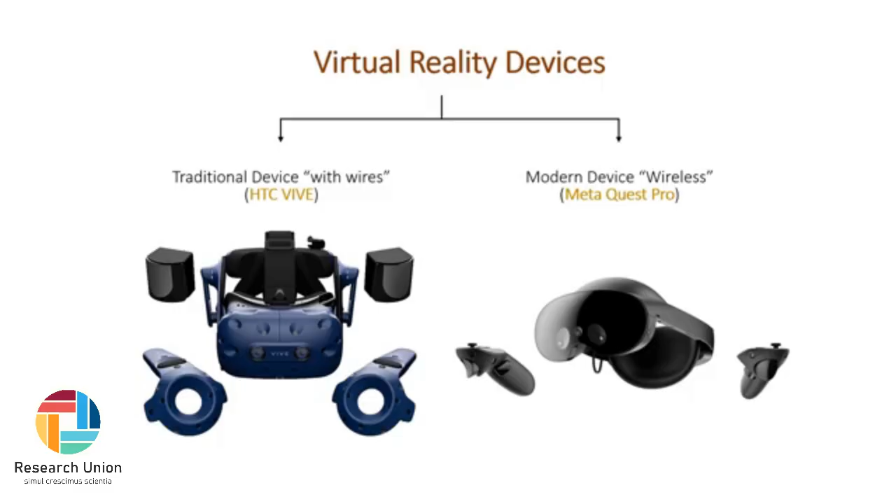This study has been conducted during weeks 10, 11, and 12.

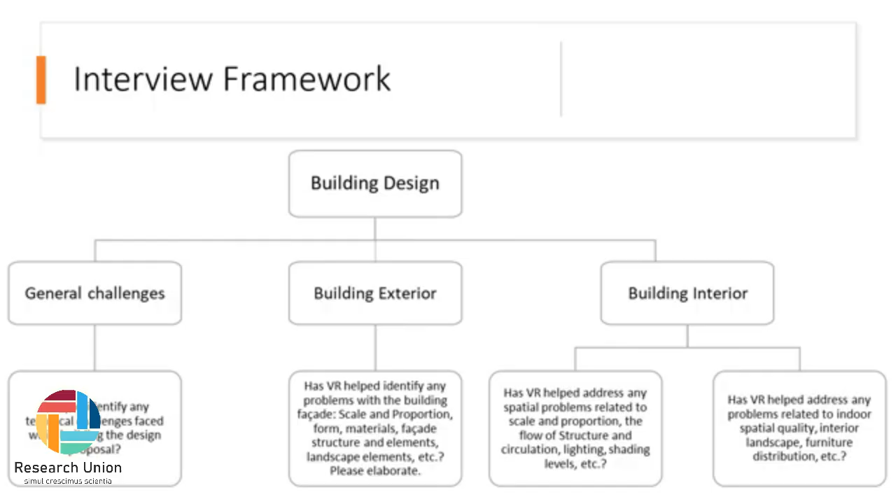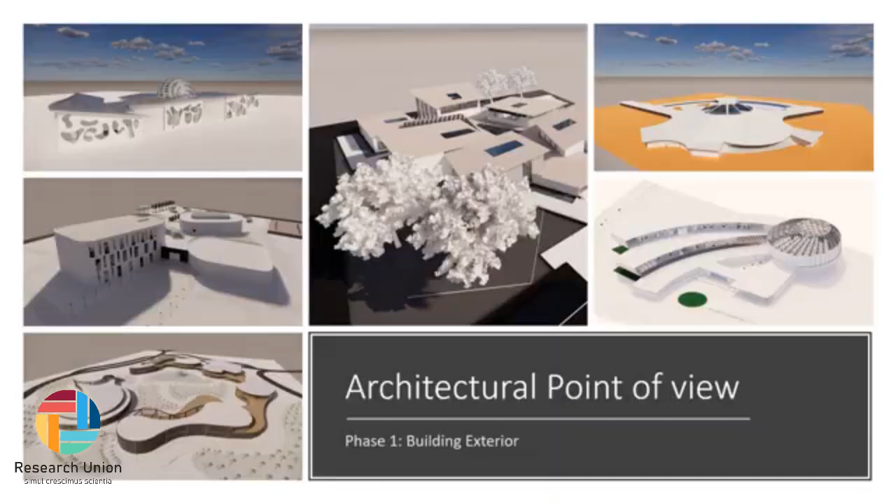This is just to show how the interviews have been conducted. This is the first part, and as I said, we have 5 students.

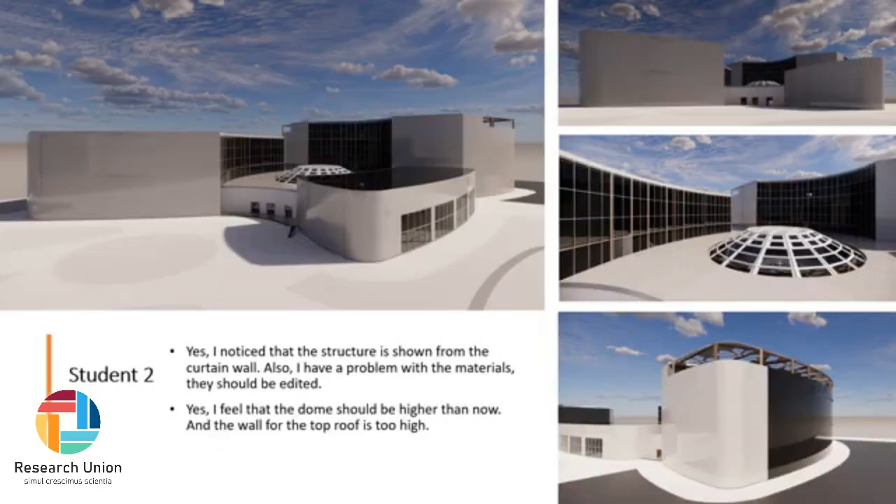So this is, for example, the answers from the students. Student 1: yes, the spacing between the louvers is not the same as I expected in Revit, for instance. Yes, it helped me see the building itself in a more realistic way. Student 2: yes, I noticed that the structure is shown through the curtain wall. Also, yes, I feel that the dome should be higher than now.

Student 3: Yes, I edited the materials, but still it's not like what I did in Revit. So you can see that Revit will not show you all the details that you desire. Also, the size of the building itself is huge. I like the building in general, but there is something not shown with my model landscaping.

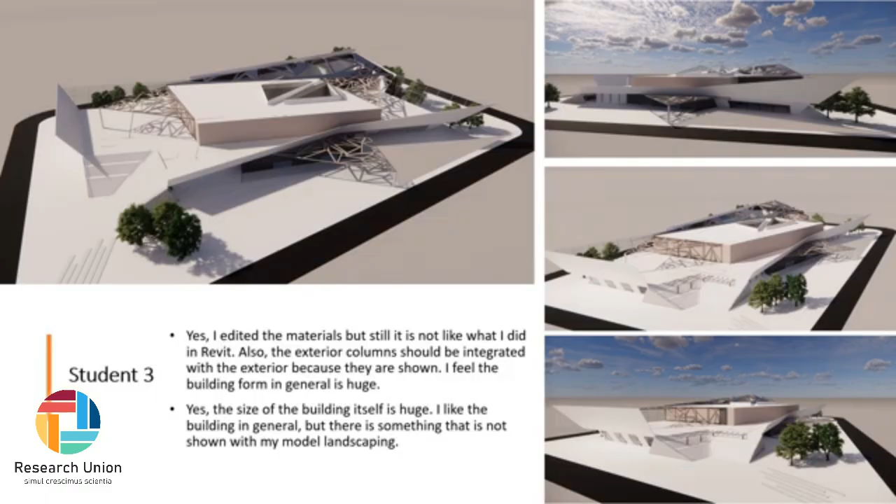Student 4: Yes, the problem is when I see it in Revit, it's not the same. For example, the facade materials are not correct also. The building size is fine as I expected.

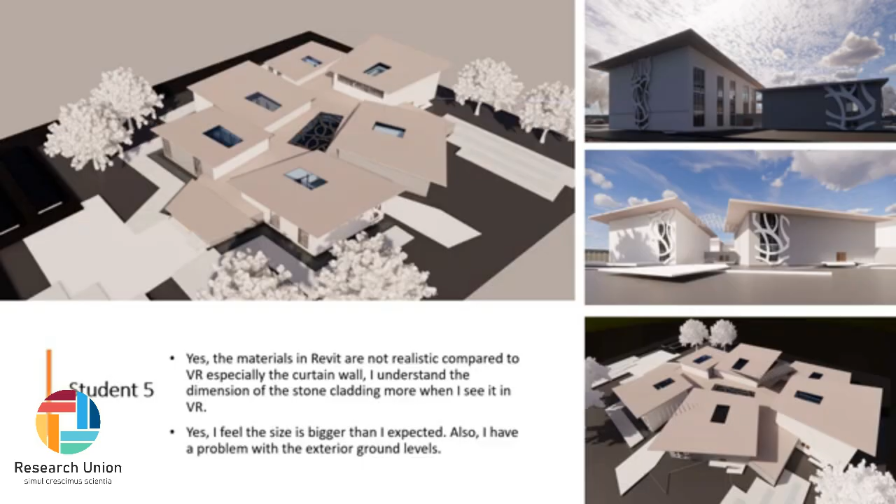Student 5: Yes, the materials in Revit are not realistic compared to the VR, especially the curtain wall for instance. I feel the size is bigger than I expected.

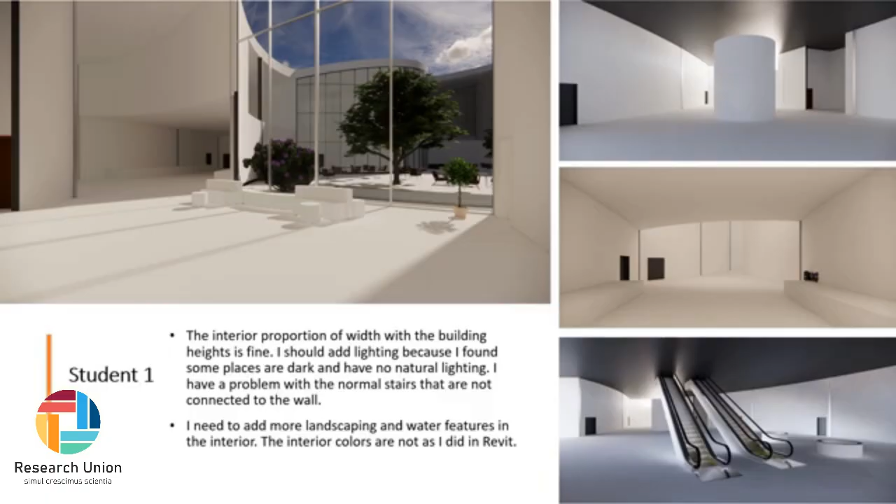Then from the architectural point of view, building interior - so the first phase was about phase 1, building exterior. Now we are within the building interior. Same thing: the interior proportions of width with the building height is fine. I need to add more landscaping and water features. This is the solution provided by the student.

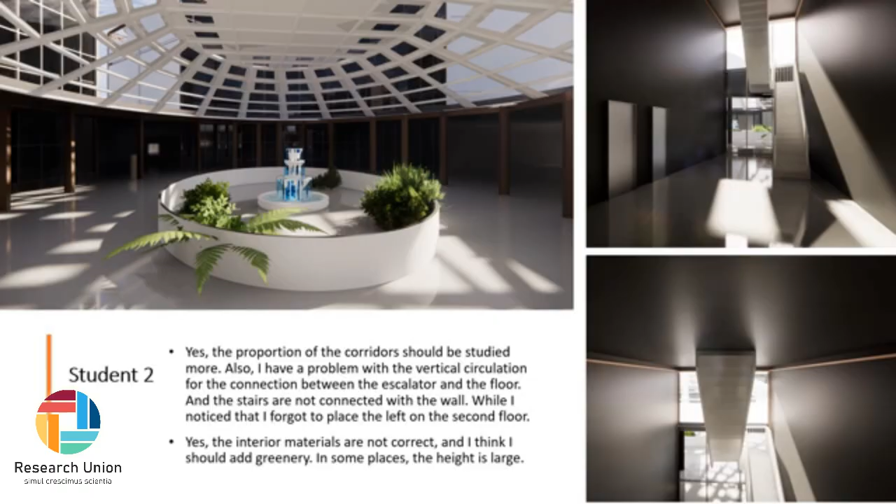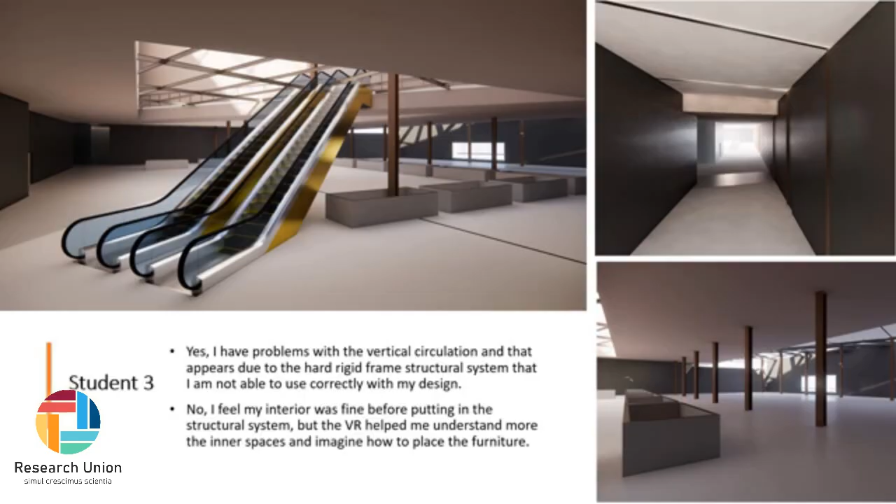Student 3: Yes, I have problems with the vertical circulation. Very important point that almost all architectural students faced during their design, especially for design 1, 2, and 3. I feel my interior was fine before putting in the structural system, but the VR helped me understand more the inner space and imagine how to place the furniture.

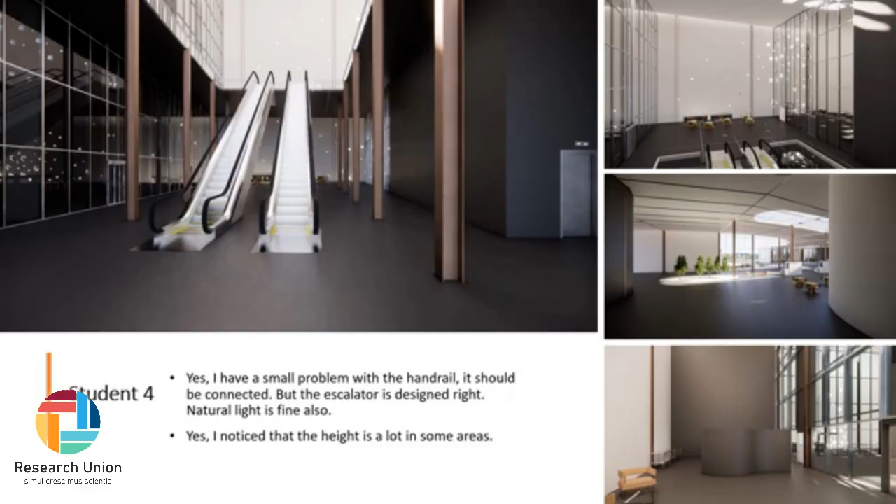Student 4: Yes, I have a small problem with the handrail. It should be connected, but the escalator is designed right. Natural light is fine also. The level of lux that you can get inside the space could be seen by using this tool. I noticed that the height is a lot in some areas.

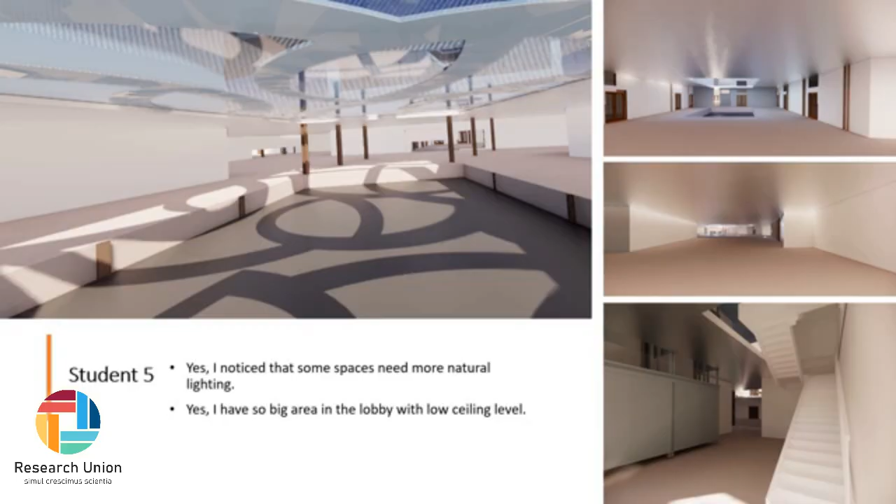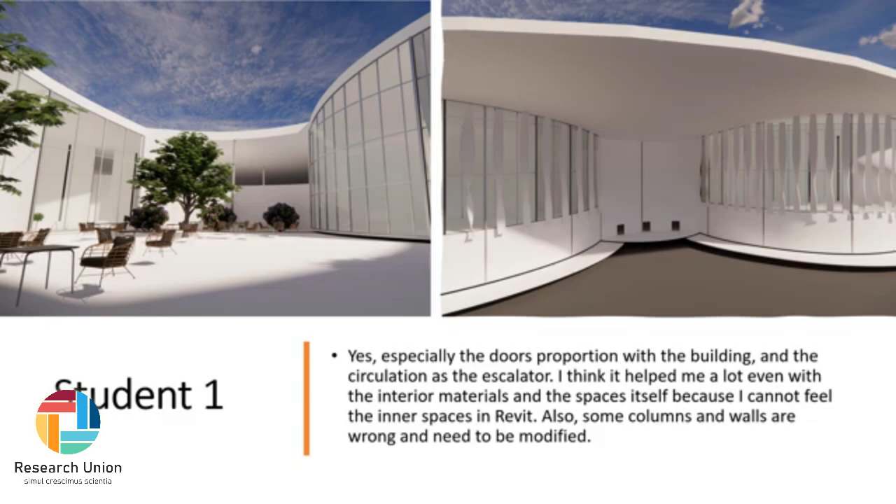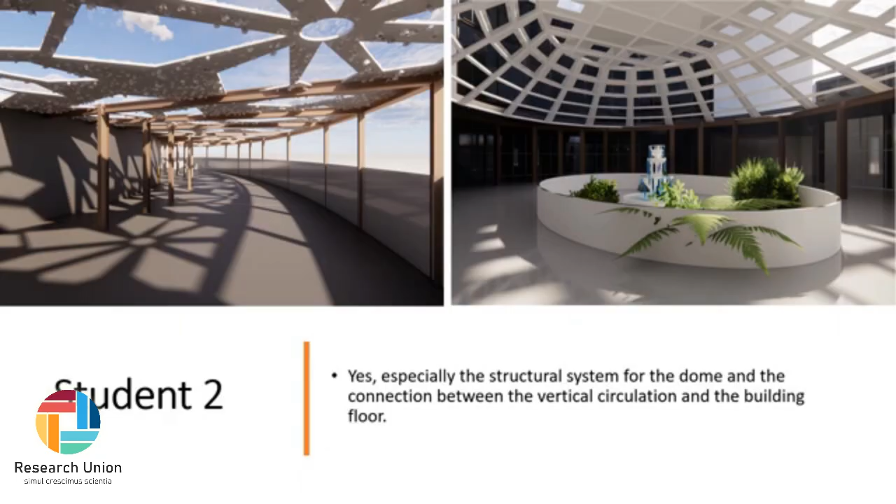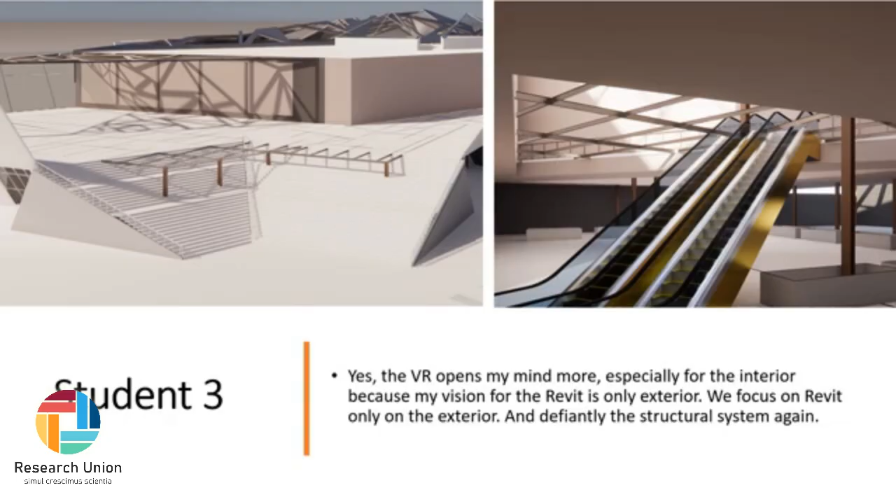Student 3: Yes, the VR opens my mind more, especially for the interior, because my vision in Revit is only exterior, and this is true. Yes, I can see it more in reality and work through it, and I can see my mistakes.

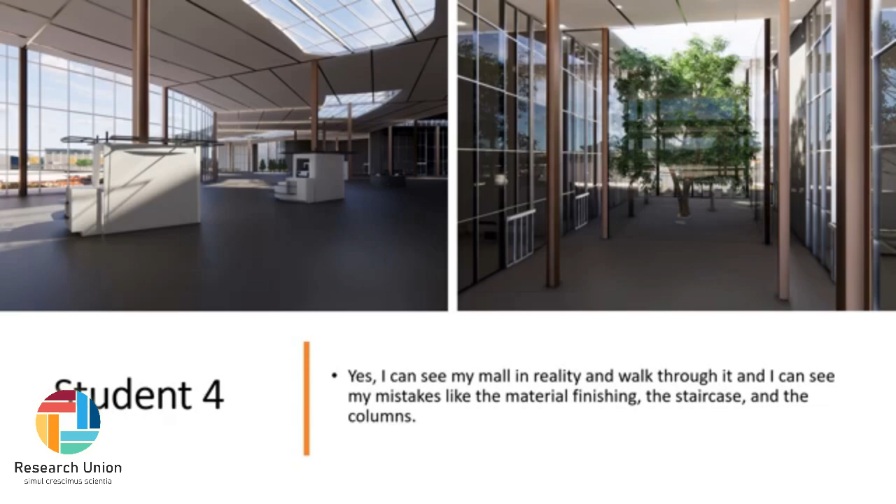This is from student 4. Student 5: Yes, it helped me to know my structure mistakes, scales, and levels.

So as a summary, as you can see, this is just the preliminary study done within this huge project. Now we are completing this by the holistic approach of integration of all systems. This could have a benefit and will have a benefit for the student.

So the research result highlighted the effectiveness of VR technology in grasping and assessing various architectural design aspects, specifically within the interior spaces and structural design, as mentioned by more than one student. Also, the research findings revealed the effectiveness of VR in identifying the following: first, enhancing the visualization of design challenges, and also providing a comprehensive building assessment and holistically detecting design quality and system integration problems, which is maybe the most critical phase in the design for all students.

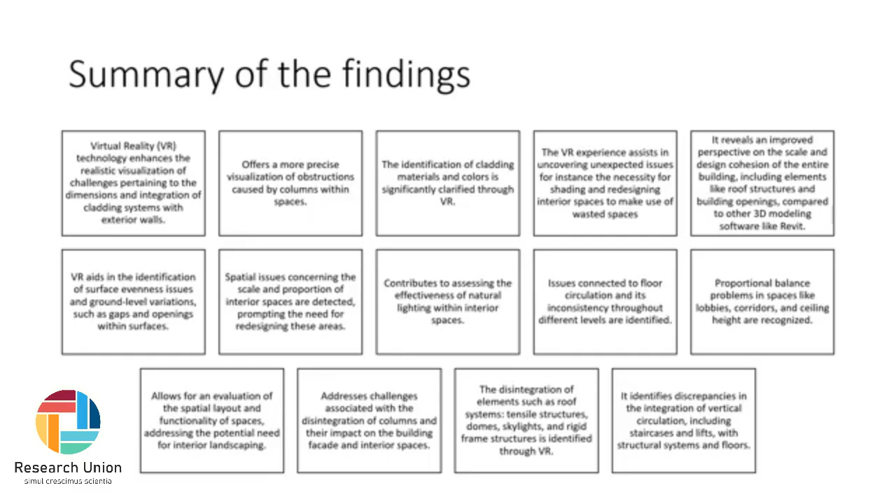So therefore, I think as a conclusion, this first phase we are very satisfied with the output, with the result. Now we will implement the second phase, which is the system integration using VR. Thank you very much.